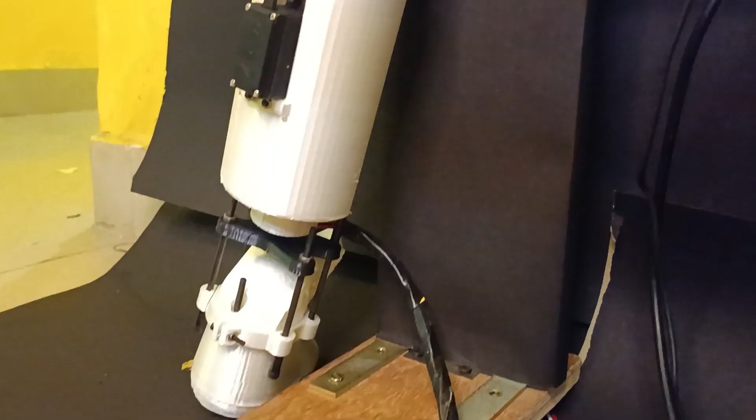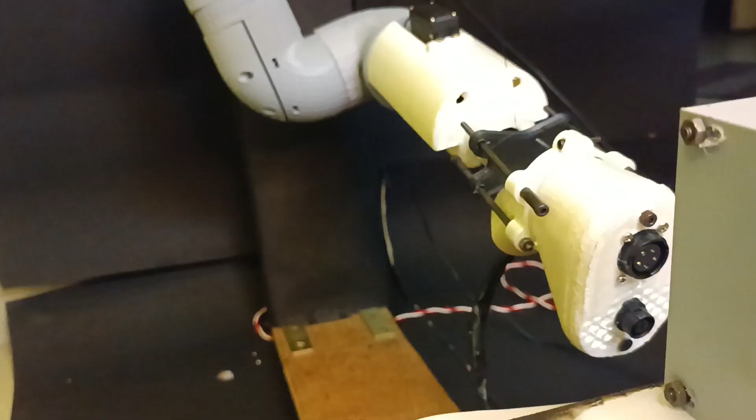Beginning with the charging port, here we have referred to the standardized SAE J1772-2009 CCS Type 1 model as advised by the Government of India.

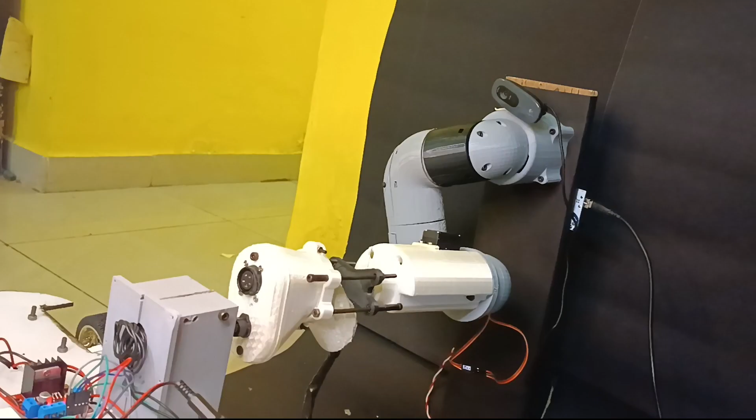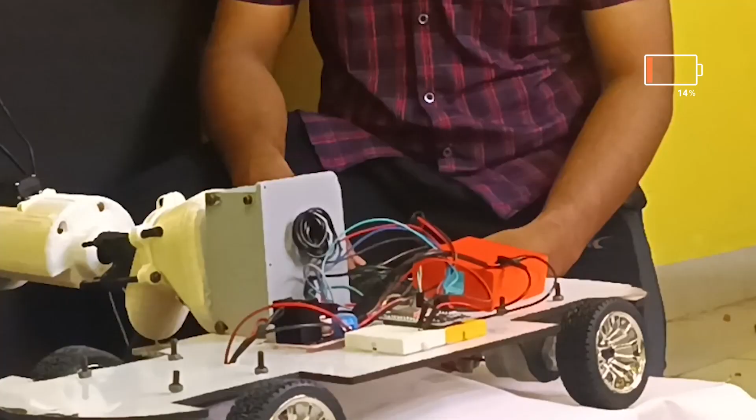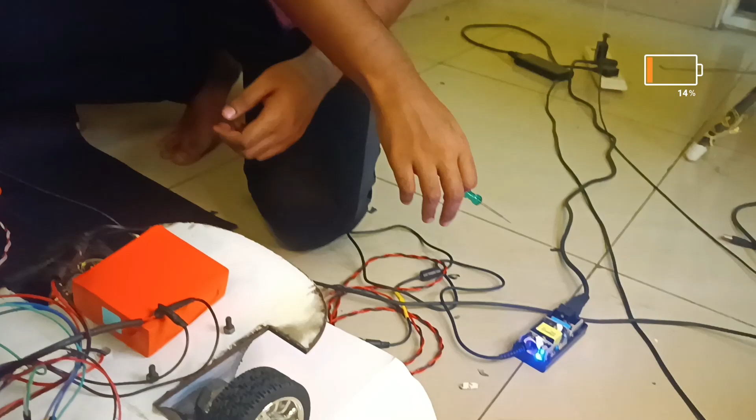Now, as the electric vehicle charges, let us dive deep into the functionalities of AIM-Care. To demonstrate the entire EV charging process, we have miniaturized the complete system comprising the electric vehicle module, the electric vehicle supply equipment, and our own AIM-Care, autonomous intelligent modular charging apparatus for roadway electrics.

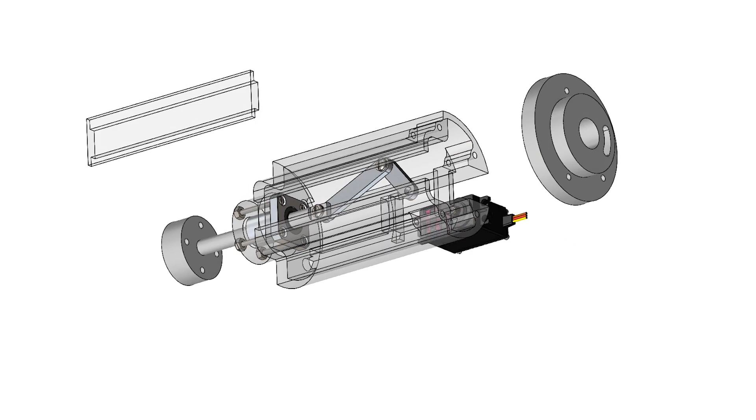For proper plug-in action of the port, we designed and developed our own custom linear actuator with a crank slider mechanism. It is actuated by a DC servo motor whose rotation is then converted into linear motion. Special bearings are used to smoothen the action.

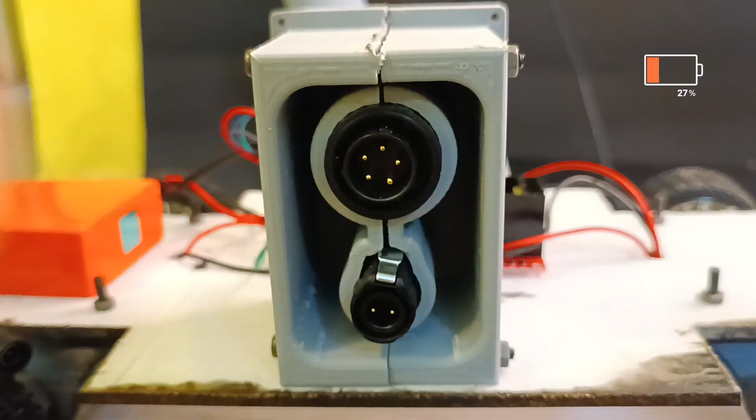It utilizes a specific connector design for both AC and DC charging. The connector includes provisions for power and signal pins for communication between the vehicle and the charging station. The AC charging voltage typically ranges from 100 volts to 240 volts, while the DC charging voltage can go up to 600 volts.

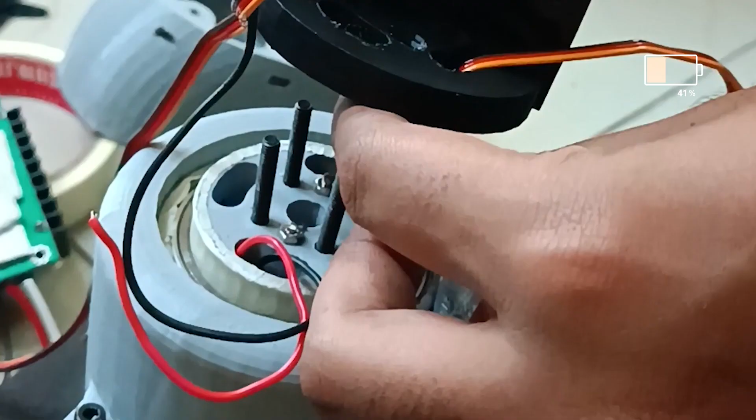Our robotic manipulator is equipped with 5 degrees of freedom. In the scope of the prototype, we have attained 3-axis navigation of the end effector by taking 3 degrees of freedom for base rotation and 2 other degrees of freedom to orient them. The joints are designed and fitted with ball bearings to withstand axial load due to plug-in action.

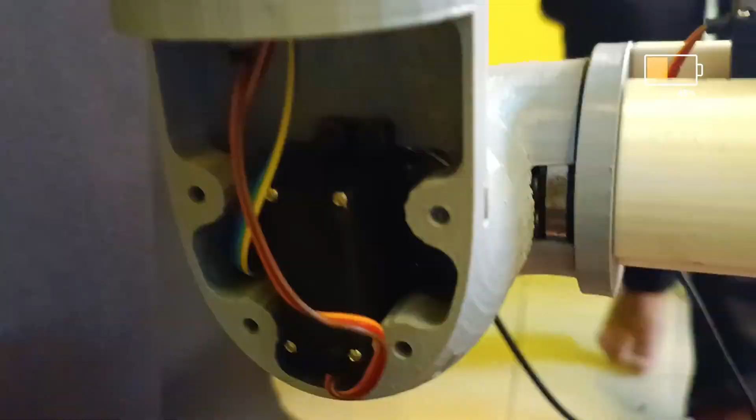The robotic arm is specially designed to have embedded wiring inside the linkages. All the wires for actuators are passed from inside the cavity of the arm. Electronic components are also kept in shielded casing and are easily accessible by just removing access panels.

High torque DC servo motors are used for our application. The entirety of the arm has been rapidly prototyped using 3D printing technology.

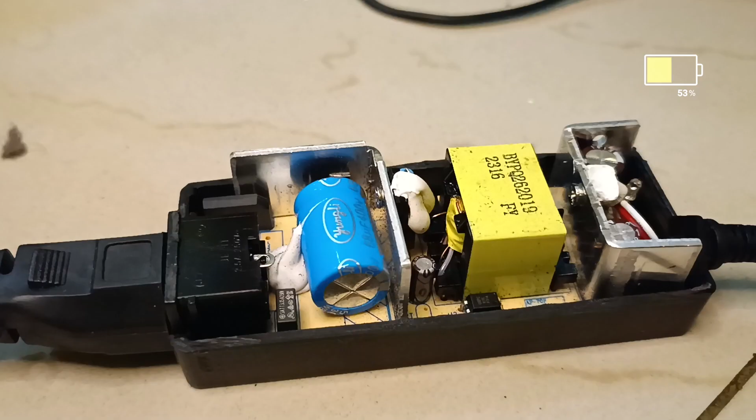In this electronic circuit, a supply voltage of 220 volts AC is initially provided and a capacitor is employed for initial energy storage. A metal oxide varistor serves as overvoltage protection. The voltage is then rectified using a bridge rectifier, converting it into 310 volts DC.

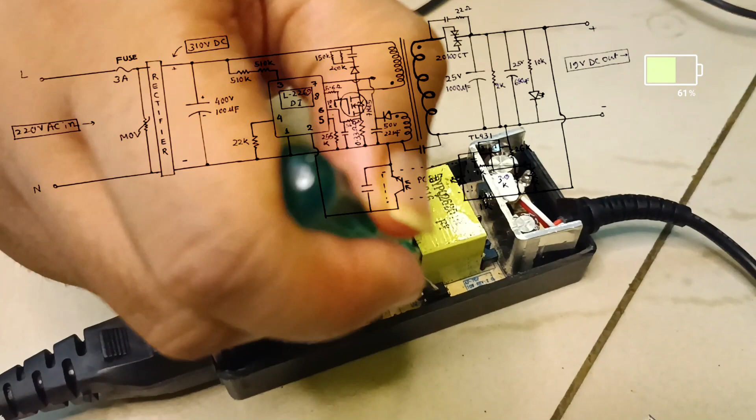Subsequently, an L2269DI IC generates DC pulses at a frequency of 65 kHz, which are supplied to the transformer. The transformer output, approximately 19 volts and 3.4 amps of current, undergoes rectification through 2 sets of Schottky diodes and is stored in 2 capacitors, which transforms it into continuous DC, ultimately serving as the circuit's output.

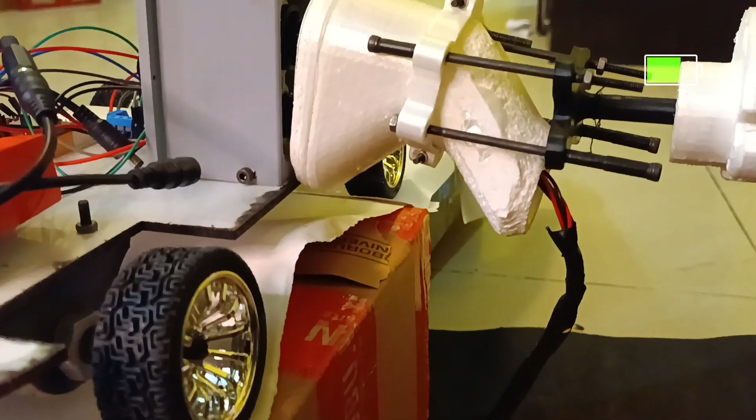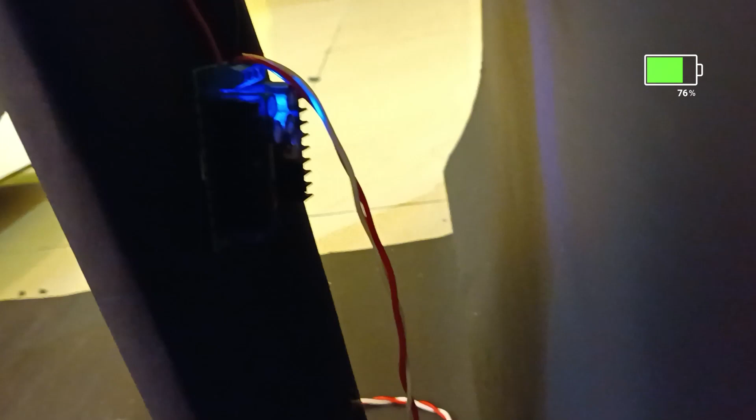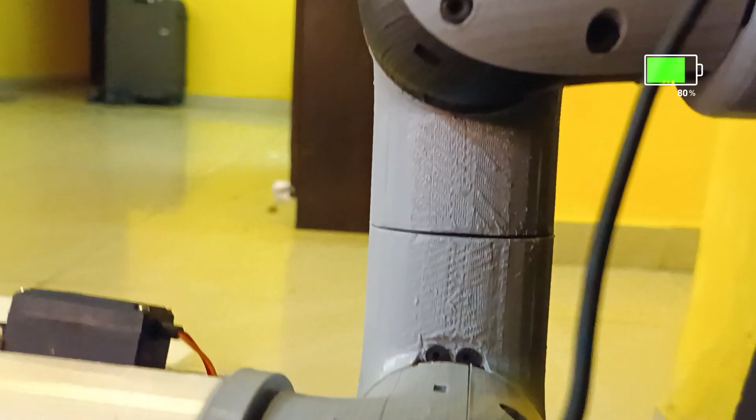To power the robotic manipulator arm, a 2S 7.4 volt lithium polymer battery is employed, followed by a DC-DC buck converter featuring overcurrent protection, yielding a stable 5 volt output. This regulated voltage is then directed to the servo driver utilizing the I2C bus, effectively steering all the servo motors responsible for the precise movements of the robotic arm.

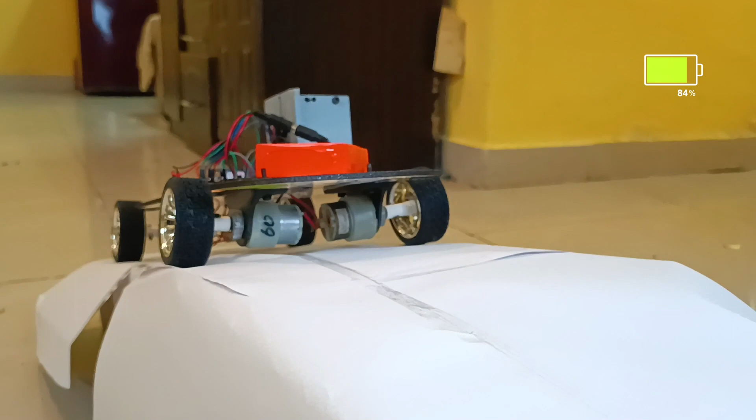Well, now the real question is, how shall the robotic arm know the presence of the EV? For that, we are using computer vision by detecting the port with the help of a high-definition digital camera.

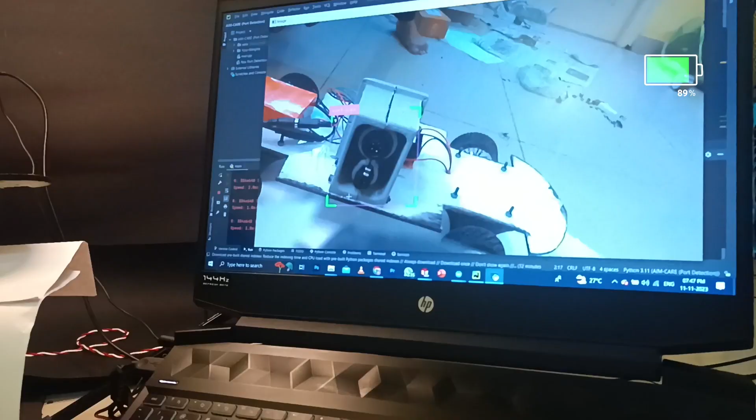The program is being run on our local computer now, but the program is made flexible so that it can also be run on an embedded single board computer like Raspberry Pi. The convolutional neural network, trained on over thousands of images of EV charging ports under different lighting and environmental conditions, makes it reliable for port detection.

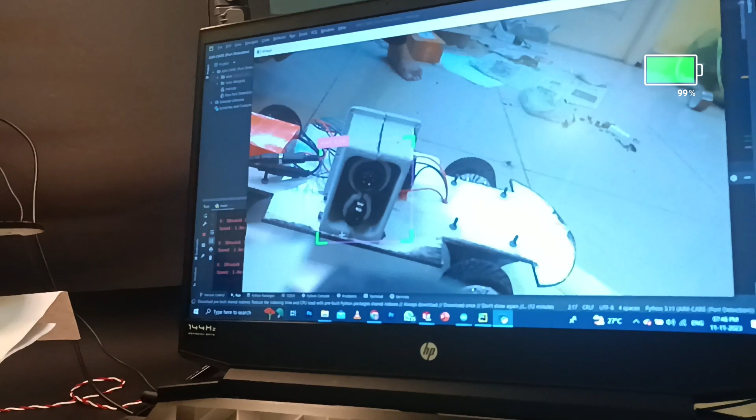The 3D pose of the robotic arm is calculated with respect to transformed values of the charging port in the camera frame. The computer then sends a command to the microcontroller, which utilizes the I2C protocol to communicate with the actuators of the robotic arm. Hence, whenever the EV enters and the camera detects the presence of the port, the charger connects itself to the port.

Upon completion of charging... Oi! See, the charging has completed now.